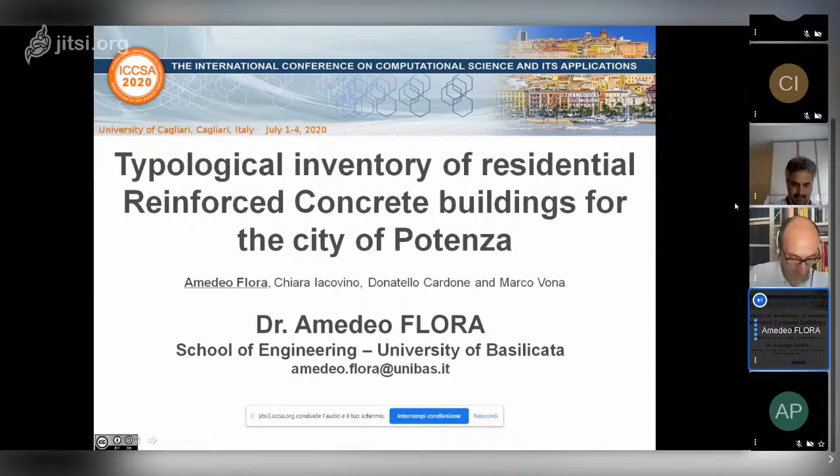Yes. Okay, good morning everybody. My name is Amedeo Flora. I'm a researcher at the University of Basilicata. The title of this presentation and the related paper, as mentioned by Maurizio, is Typological Inventory of Residential Reinforced Concrete Buildings for the City of Potenza. First of all, let me say that the proposed study is just the first part of a larger research activity aimed at the evaluation of the seismic resilience of the examined area.

This study is funded by the PON Research Project and is focused on cultural heritage protection. The main goal of this part of the study is a preliminary investigation on the built heritage of the city center of Potenza, and also the identification of the main typological and structural features of the residential reinforced concrete (RC) constructions through an integrated approach based on census data, documentary analysis, and site and virtual inspection. The main product is a building typologies inventory composed of 36 elements, 36 typologies.

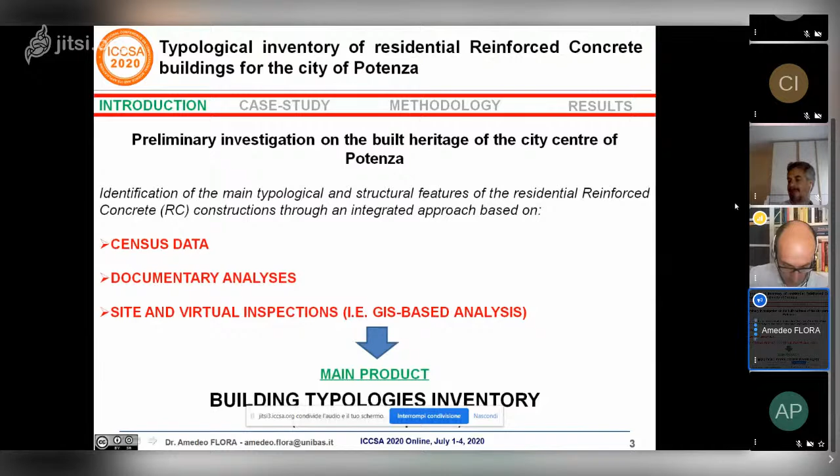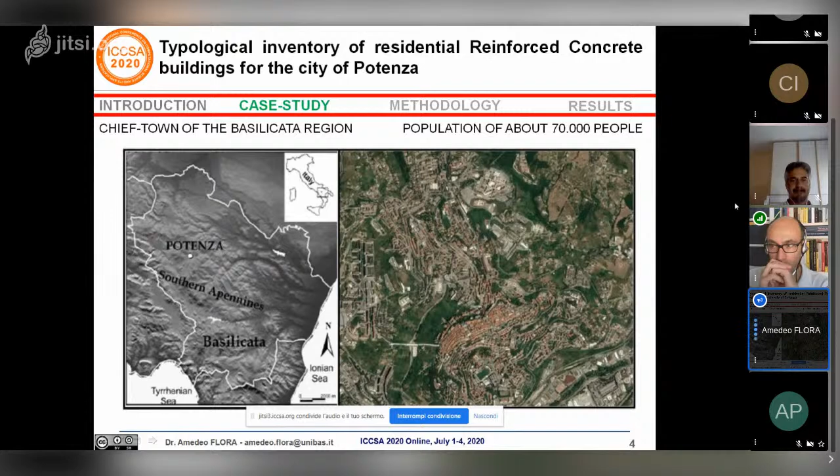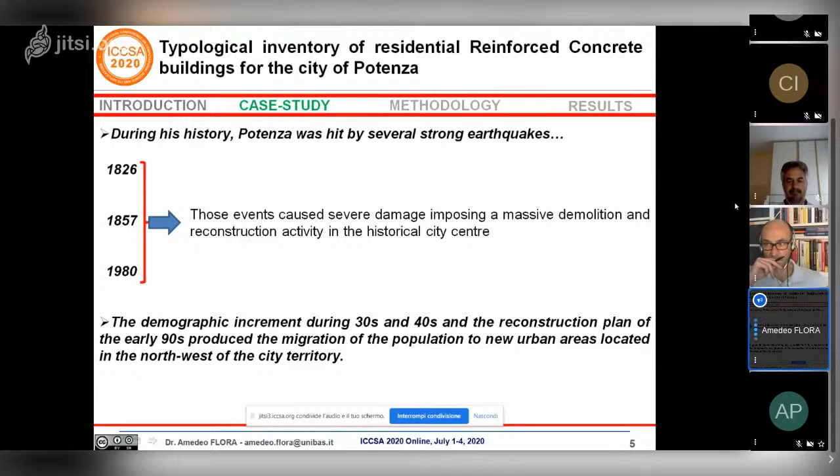The city of Potenza has been selected as case study. Potenza is the chief town of the Basilicata region in southern Italy, with a population of about 70,000 people. During its history, Potenza was hit by several strong earthquakes, in particular those of 1826, 1857, and 1980, which caused severe damage, imposing massive demolition and reconstruction activity in the historical city center. Moreover, from the urbanistic point of view, the demographic increment during the 1930s and 1940s and the reconstruction plan of the early 1990s produced the migration of the population to new urban areas located in the north-west of the city territory.

All that considered, in the present study, two main sample areas, including most of the historical built heritage of the city, have been investigated.

So the hilltop town, labeled as C1, and the residential public housing neighborhood, labeled as C2 in the figure. And those areas can be considered as homogeneous zones, or compartments, featuring specific historical, urbanistic, and constructive peculiarities.

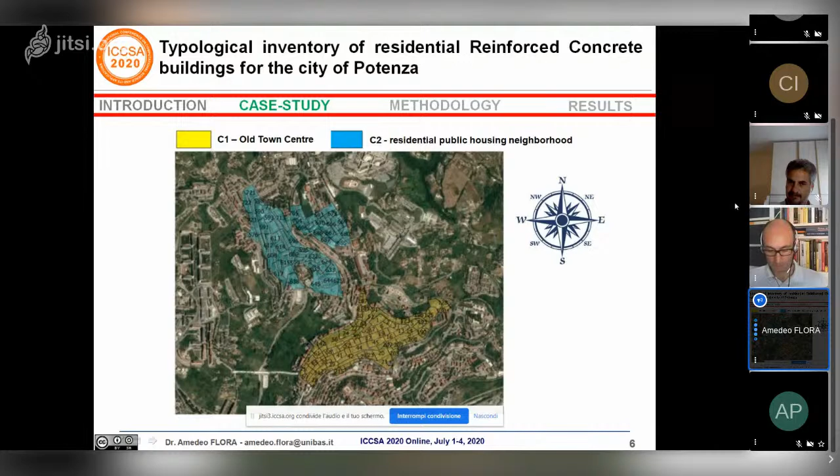For what concerns the methodology for the inventory definition, we can say that the assembling approach is based on the combination of two different informative levels. The preliminary source is represented by census data provided by the Italian Institute of Statistics, ISTAT, but unfortunately these data are available only in aggregated form due to privacy policy. So secondary sources of information are needed to integrate the census data for the definition of the inventory.

In the following slides, you can see some data obtained from ISTAT in the aggregated form, and in particular, first of all, the percentage distribution of residential buildings in terms of construction materials, in terms of age of construction, and in terms of number of stories. So, focusing on the more relevant data, we can note that, first of all, in both compartments, the percentage of masonry buildings is prevalent, and as expected, this percentage is extremely high in the old town center, C1, being equal to approximately 80%.

However, a significant percentage of RC buildings, approximately equal to 25%, is also observed. And this is probably due to some political decisions on the whole town planning taken between 1945 and 1970. In fact, in this period, many old masonry buildings in the historical center were demolished and replaced by new RC buildings, and similar interventions were carried out in the aftermath of the Irpinia and Basilicata earthquake in 1980, and this led to a non-negligible percentage, around 10%, of RC buildings realized in the period 1981-1990.

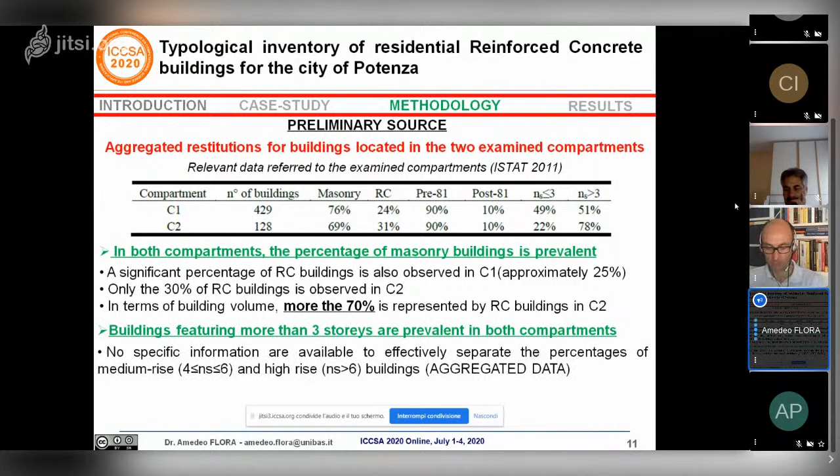Moreover, considering that the seismic behavior is strongly affected by the structure height, important considerations can be derived analyzing the aggregated data with respect to the number of stories. In particular, buildings featuring more than 3 stories are prevalent in both compartments, C1 and C2. But unfortunately, as mentioned before, based on the aggregated data, no specific information is available to effectively separate the percentage of low, medium, and high-rise buildings.

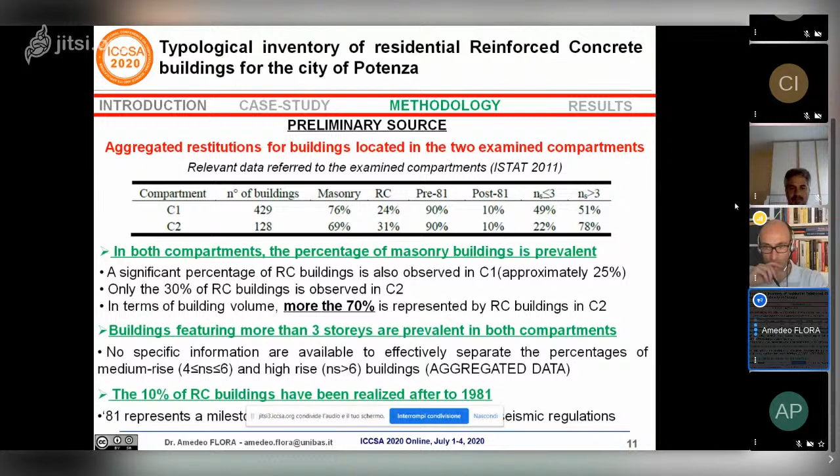Finally, we can note that 10% of RC buildings have been realized after 1981 in both compartments, and this is very important considering that 1981 represents a milestone for the introduction of the first seismic regulations in Italy. So, based on the previous considerations, 2 main variables emerged as significant classification parameters, in particular the number of stories and the age of construction. For the age of construction, 2 main groups have been identified: pre- and post-81 buildings.

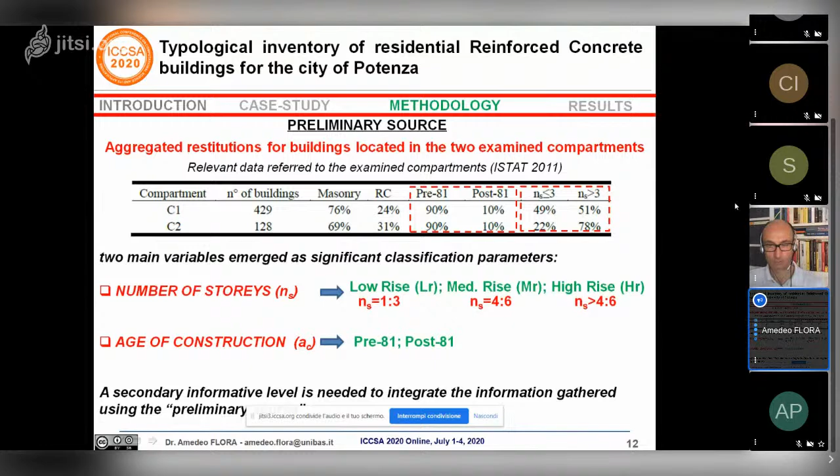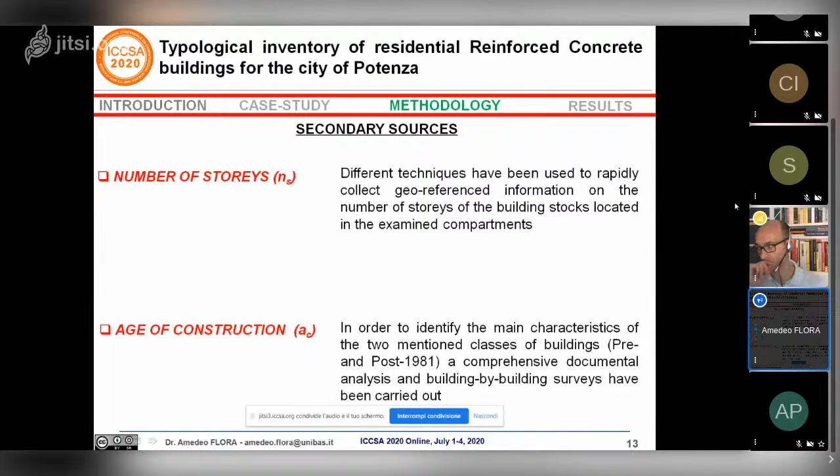Obviously, a secondary informative level is needed to integrate the information gathered using the preliminary source. For the number of stories, different techniques have been used to rapidly collect georeferenced information on the number of stories of the building stocks located in the compartments, thus allowing a proper deaggregation of the mentioned data. For the age of construction, in order to identify the main characteristics of the 2 mentioned classes of buildings, pre- and post-1981, a comprehensive documental analysis and building surveys have been carried out.

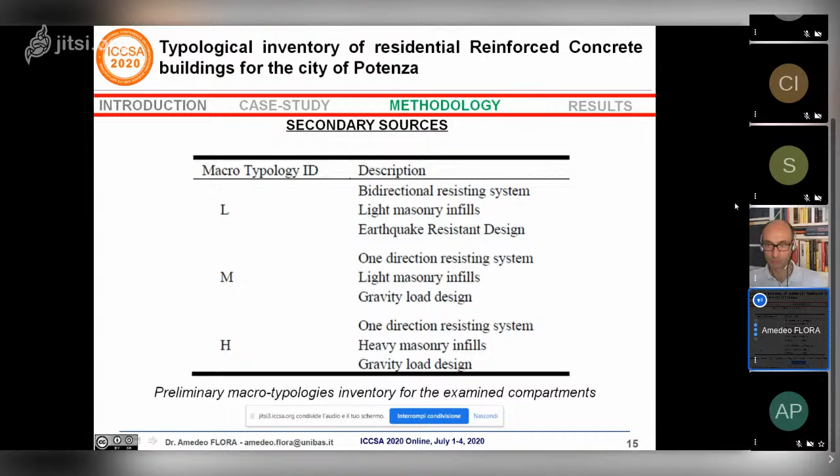The preliminary inventory can be then further refined considering other specific building attributes that strongly affect the seismic behavior. So, besides the number of stories, other significant attributes are represented by irregularities in elevation and staircase typology. In particular, vertical irregularities are frequent for both pre- and post-1981 buildings and are mainly represented by an open ground story, so pilotis stories at the first floor.

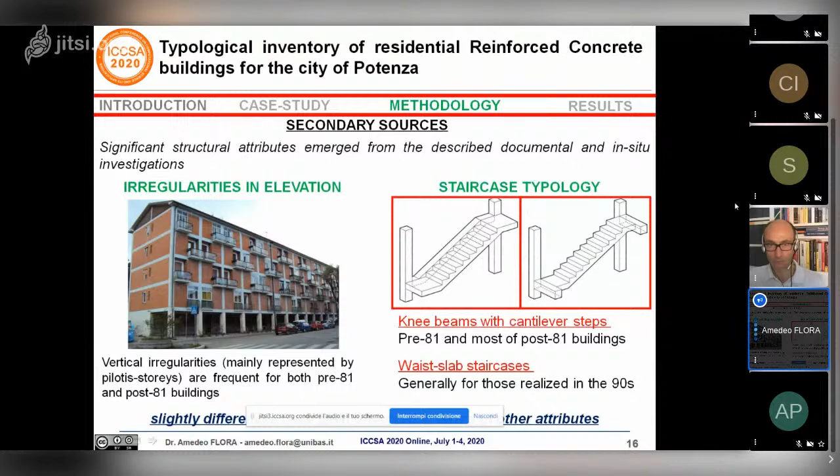On the other hand, 2 main staircase typologies have been considered: knee beams with cantilever steps and waist slab staircases. Then slight differences have been observed in terms of other attributes, such as roof type, horizontal floor, etc. So, such attributes have been neglected in the final inventory.

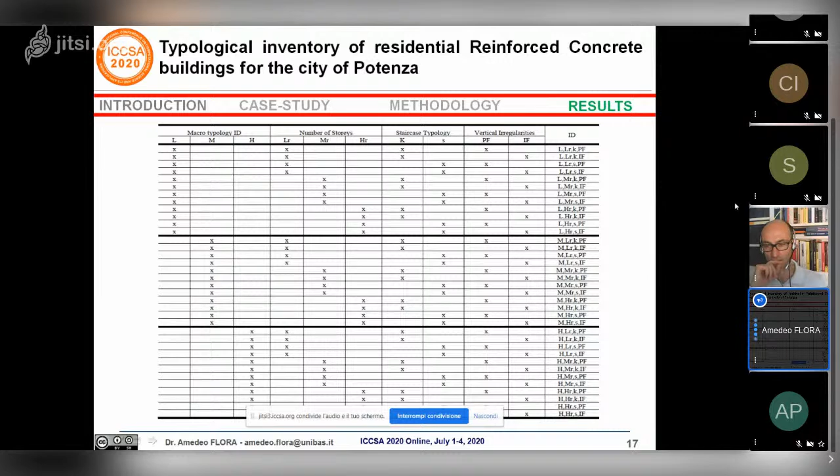The final building inventory, obtained adopting the described approach, is shown in this table, and as you can see, 36 classes have been finally identified, considering all the mentioned attributes. You can see number of stories, staircase typology, vertical irregularities, and all the peculiarities that are directly included in the macro typologies, L, M, and H.

So, in conclusion, first of all, a simplified approach aimed at assembling a building typologies inventory is presented and applied to the urban residential area of Potenza. A preliminary inventory for RC buildings has been defined based on heuristic criteria.

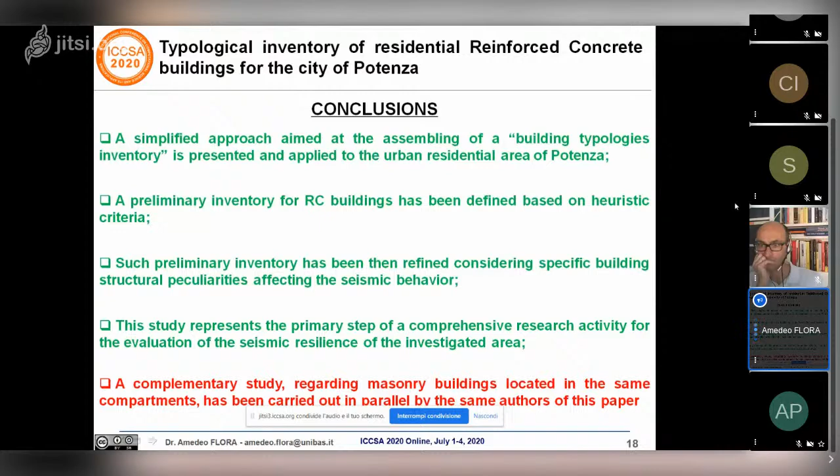Such preliminary inventory has been then refined considering specific building structural peculiarities affecting the seismic behavior. And it is important to note that, as mentioned in the first slide, this study represents just a primary step of a comprehensive research activity for the evaluation of the seismic resilience of the investigated area, and a complementary study regarding masonry buildings located in the same compartments has been carried out in parallel by the same authors of this paper and will be presented just after this presentation by my colleague Chiara Iacovino.

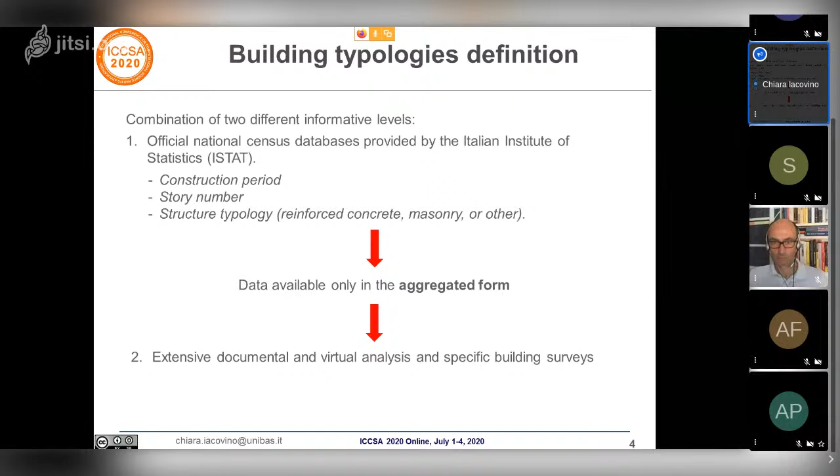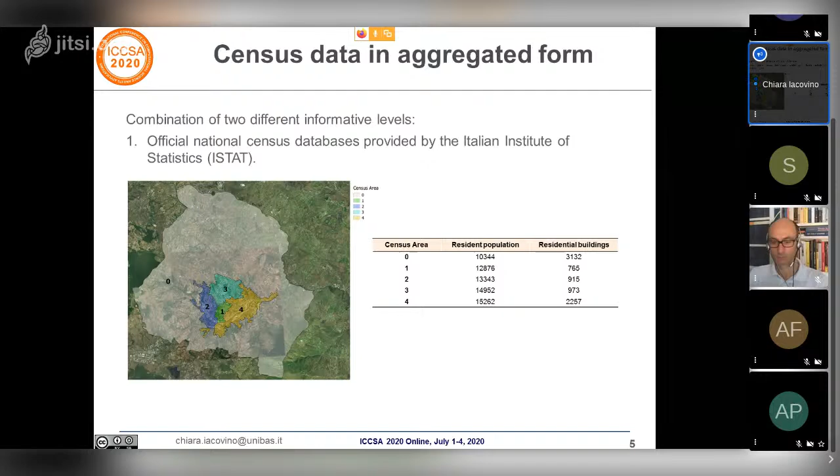This figure shows the selected census tract of the Old Town Center in yellow and of the residential compartment in blue. The tables report the aggregated data of the buildings located in the two compartments. We can see that the percentage of masonry buildings is high in both compartments, being equal to approximately 80% in the Old Town Center, but is also high in the residential compartment, where most of the buildings were built with a load-bearing masonry structure during the period

1940-1960. Buildings featuring more than 4 stories are prevalent in both compartments, but due to the aggregated form of this data, no information is available to separate the percentage related to masonry buildings from the percentage related to reinforced concrete buildings. And finally, we can see that in the historic center of Potenza, most of the buildings were built before 1919.

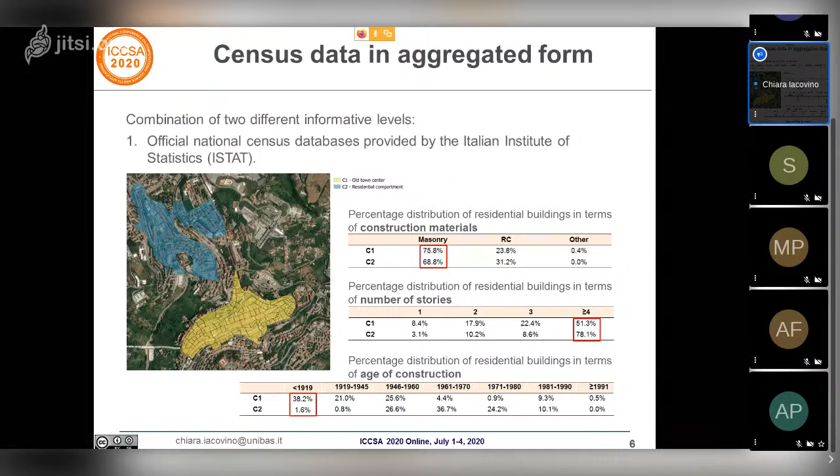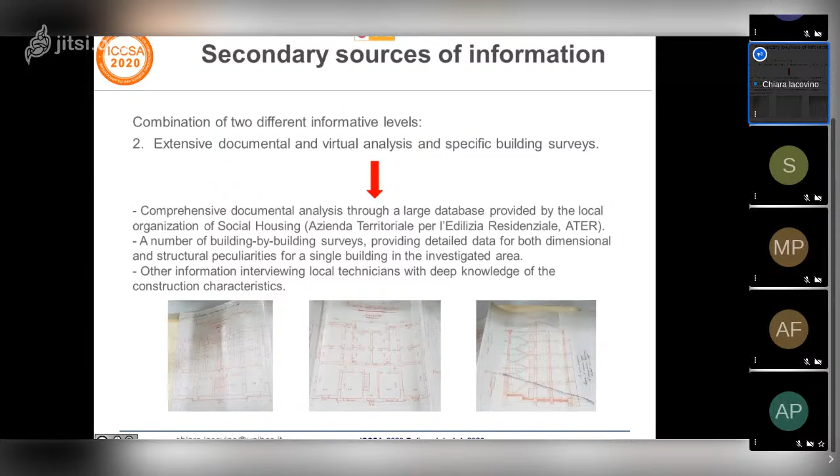In addition to census data, comprehensive documental analysis has been carried out. In particular, a large database provided by the local organization of social housing has been analyzed. Then building-by-building surveys have been performed, and finally other information has been obtained by interviewing local technicians with deep knowledge of the construction characteristics.

The most significant parameters, in addition to the number of stories and the period of construction, for example, the type of vertical and horizontal structure, the type of roof, the presence of vaults, the presence of mixed structures, and so on, have been considered. This table summarizes the main characteristics of the masonry constructions, named MUR, derived by the investigation.

The MUR 1 typology concerns the first buildings built outside the historic center during the 1920s. The buildings are made of regular masonry with floors with hollow bricks and steel beams, and no connections are present. So the seismic behavior of this typology of construction is usually ruled by the out-of-plane mechanism.

The features of the MUR 2 typology are external walls made of cut stone with good bonding and a vault floor with bricks and steel beams. Over the years, some of these buildings have been subjected to localized seismic intervention, consisting mainly of widespread connections. The third typology groups constructions made by solid brick masonry with a rigid slab and connections between vertical walls and horizontal elements.

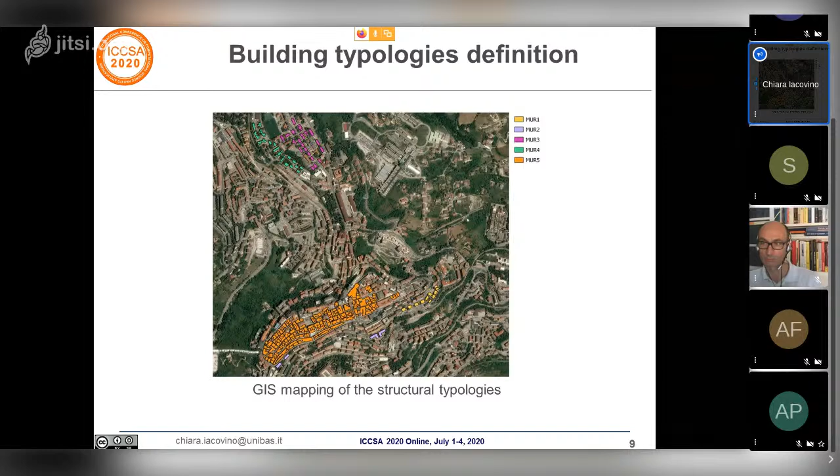This figure shows a GIS mapping of the different structural typologies. The preliminary inventory, composed of 5 macro typologies, has been further refined considering other building characteristics.

With regard to the number of stories, the analyzed masonry structures can be grouped into 3 classes: low-rise, medium-rise, and high-rise buildings. With reference to the shape in plan, 2 other classes have been considered, and finally, 2 more classes have been identified taking into account the presence or not of the slab-wall connection.

So, starting from 5 macro typologies and then considering 3 classes for the number of stories, 2 classes with reference to the shape in plan, and 2 classes with reference to the slab connection, we have identified 60 typologies.

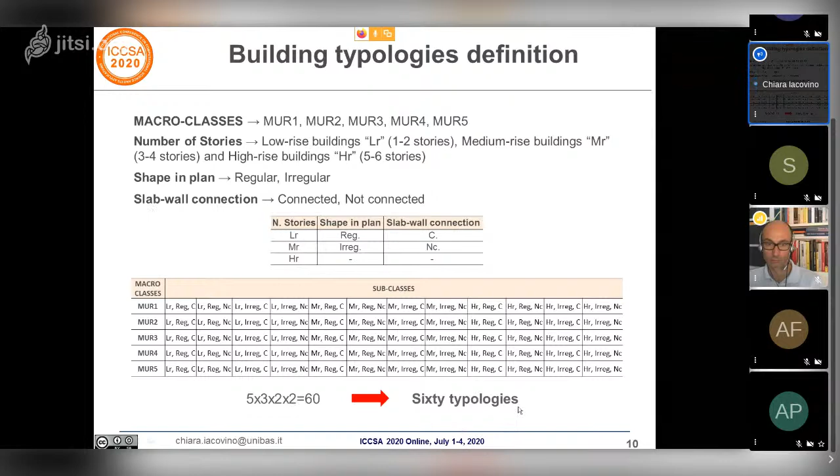To conclude, in this work, a simplified approach aimed at defining a masonry building inventory is presented and applied for the urban residential area of Potenza.

A preliminary inventory has been defined and then further refined considering other specific building structural characteristics, arriving at 60 typologies. It's worth noting that other characteristics, such as structural element dimensions, building position in a block aggregate, and the percentage and arrangement of openings in walls, will be taken into account at a later stage of the research project, particularly during the numerical modeling of the selected buildings.

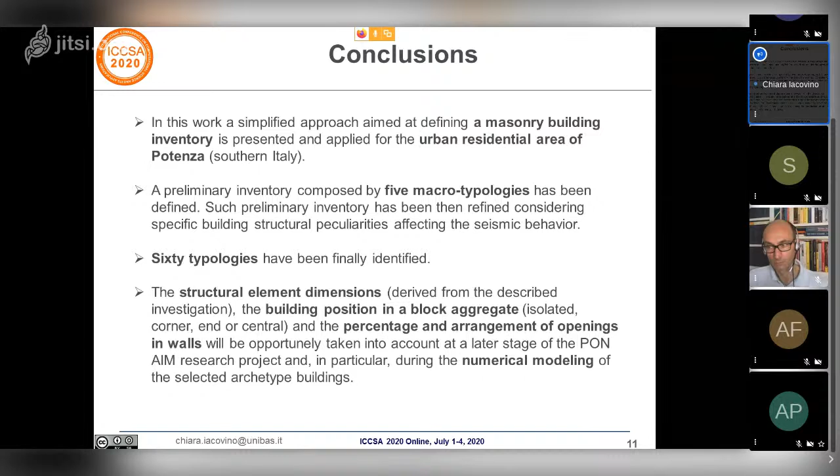Thank you for your kind attention.

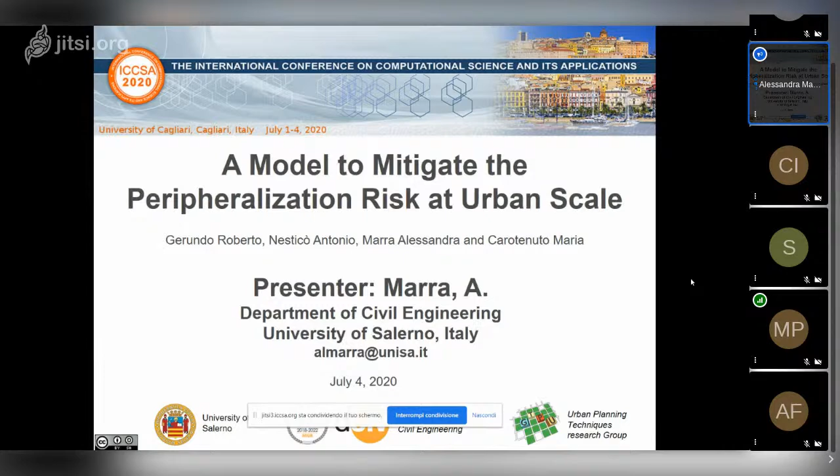The expansion of cities and of multiple forms of poverty on a global level has changed the geography of degradation. In Europe and in Italy, degraded urban areas are often associated with peripheries, born starting from the edge of historic city centers. But nowadays it is appropriate to talk about peripheralization rather than peripheries, as some scholars have observed also in other disciplines, such as economic geography, social sciences, and so on.

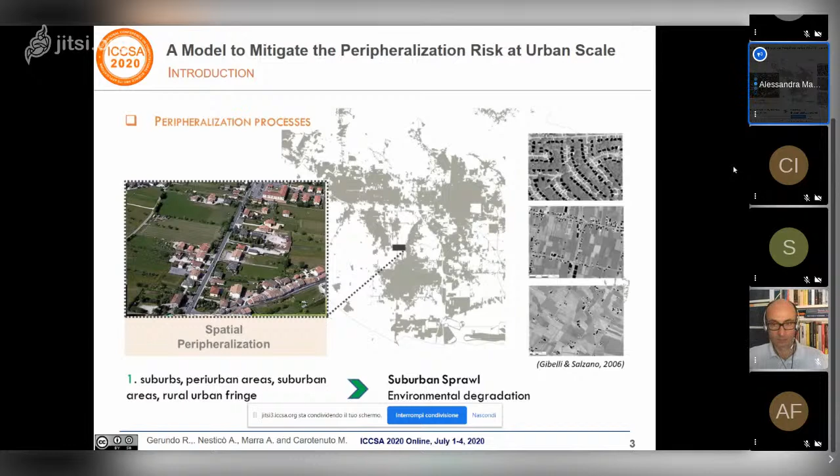Peripheralization is intended as a dynamic process that produces degradation in spatial peripheries, with reference to peri-urban areas where risk is mainly connected to sprawl and land consumption. But this process can also affect typical central areas with reference to the multidimensional concept of urban poverty or to the European one of deprivation.

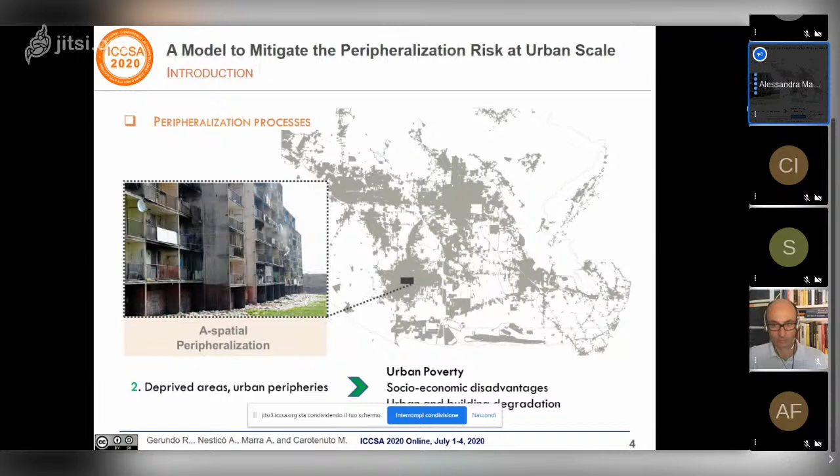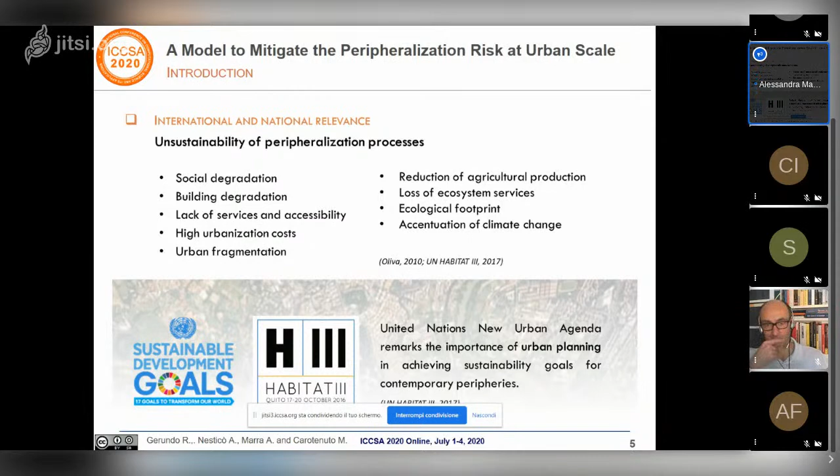All these processes are associated with unsustainability. Reducing land consumption and urban poverty through the regeneration of deprived areas are key issues to the new urban agenda and to the European Union. In fact, over the years, the European Commission has financed several actions to reduce degradation, with, for example, urban regeneration projects.

In Italy, scientific criteria are generally not used for the identification of degraded areas subject to intervention, but their recognition is usually delegated to the municipal authorities, on the occasion of call for funding.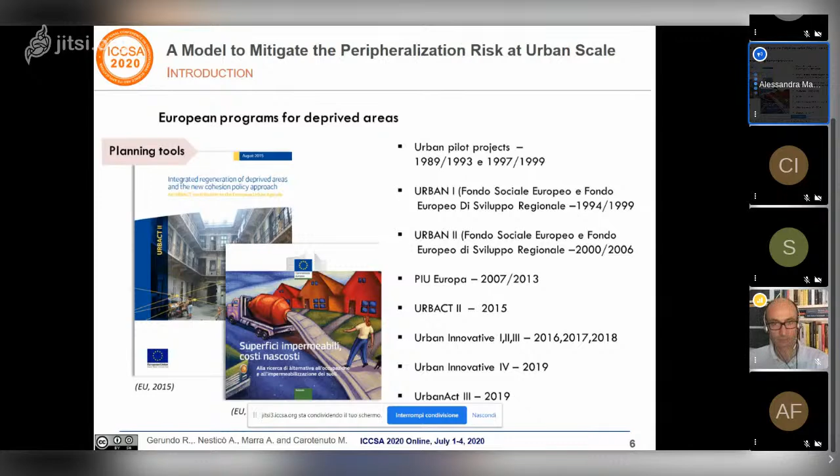Interventions are mainly driven by economic convenience in real estate transformations. In contrast to this, some scholars propose multi-criteria evaluations of project proposals in order to maximize public benefits. Among the different techniques, the use of the analytical hierarchy process is frequent. In fact, it allows consideration of a greater number of criteria, an important feature in the evaluation of complex programs.

Such as regeneration programs. However, in the light of the new urban and socioeconomic geography, regeneration interventions must be directed primarily to the most vulnerable areas. So decisions about the most effective project proposal should be informed of persisting vulnerability levels, and this is possible when the planning and the localization of interventions takes into account the multi-criteria evaluation of the best design alternative. This is our idea, and the novelty of the work.

So the objective of this work is to characterize a model for the mitigation of peripheralization risk at urban scale, so as to provide a decision support system for the choice of the best design alternative in order to maximize risk mitigation.

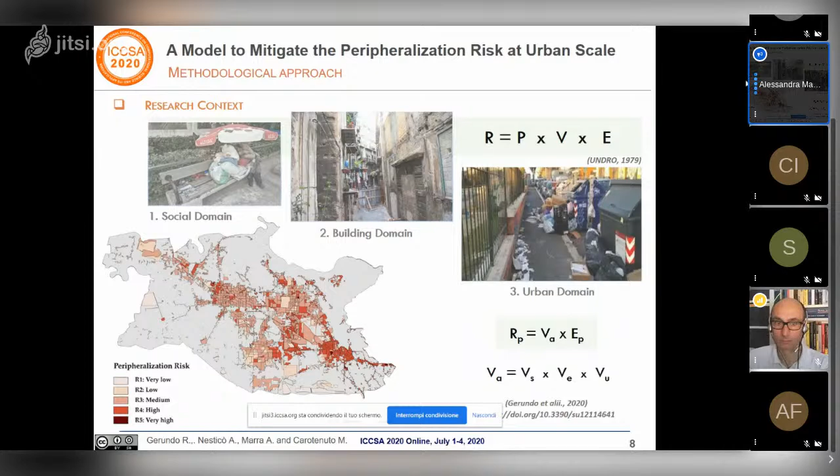Following that work, the method here proposed identifies a set of mitigation indicators with specific reference to vulnerability indicators used for the localization of priority areas. Mitigation indicators here proposed allow estimation of the effects of project proposals on social, building, and urban domains, with the aim of reducing vulnerability and therefore risk.

The first phase is the definition of mitigation indicators, then the procedure is articulated in all the phases of the analytical hierarchy process, with a little variation, as we will see.

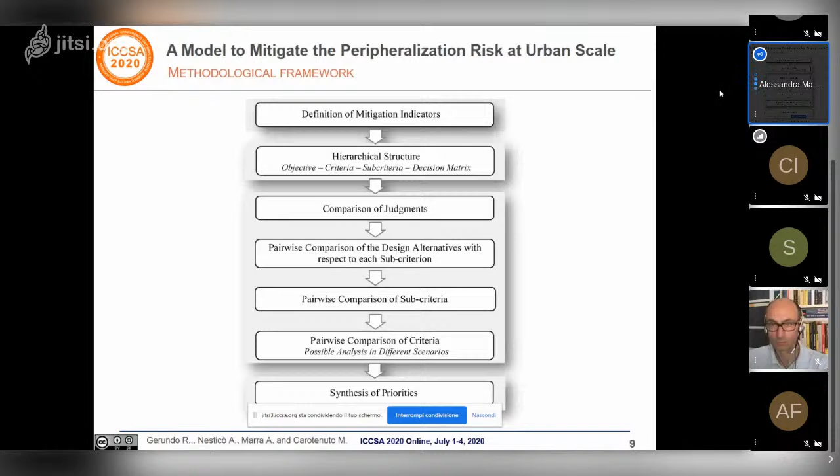With reference to the social domain, mitigation indicators measure new employees, graduates in secondary school, and the ability of the city's physical functional structure to attract young families.

With regard to the building domain, they measure interventions to improve the state of building housing stock. For the urban domain, indicators estimate actions aimed at increasing supply of services and permeable green spaces, recovery of abandoned or degraded areas, as well as reducing the fragmentation of the urban fabric.

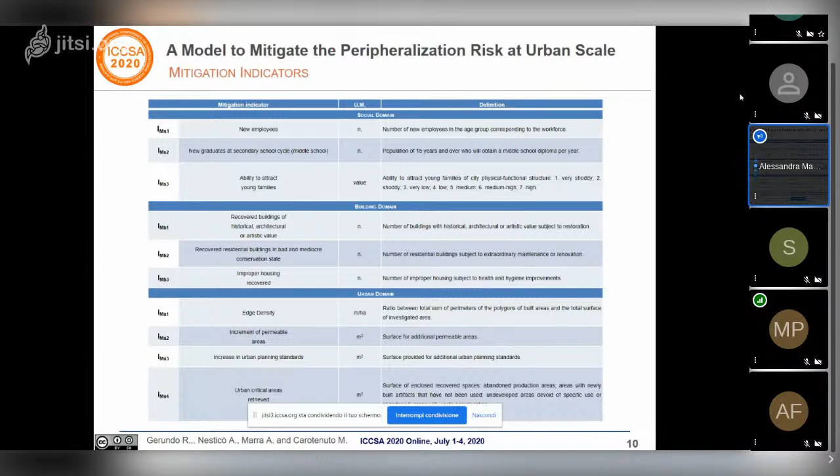The proposed dominance hierarchy consists of 3 levels. At the highest level, there is the objective. At the second level, there are the criteria, which correspond to vulnerability domains. At the third level, there are the sub-criteria, to which mitigation indicators correspond.

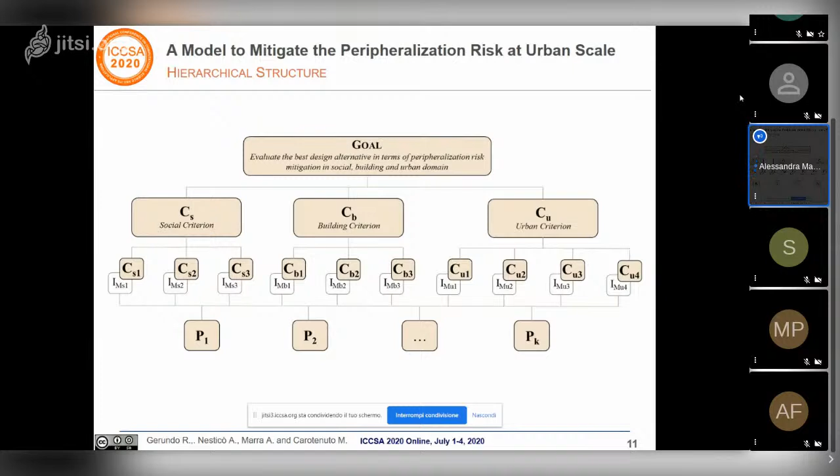All 10 sub-criteria are measurable for each of the K design alternatives, among which the decision maker is called to choose. For each design alternative, the values of mitigation indicators constitute the lines of the decision matrix, while the columns relate to the values of the specific sub-criteria.

We proceed to the pairwise comparison of project proposals with respect to each sub-criterion, then to the pairwise comparison of sub-criteria for each domain, and then to the pairwise comparison of criteria.

The pairwise comparison was carried out with reference to Saaty's semantic scale, useful for the attribution of dominance coefficients. In the pairwise comparison of criteria in particular,

Analyses in different scenarios are possible. For example, in the first scenario, all criteria have the same importance, while a very relevant scenario that is possible to consider is that where the weight of the criteria depends on the vulnerability levels obtained from the peripheralization risk analysis already carried out in the research project.

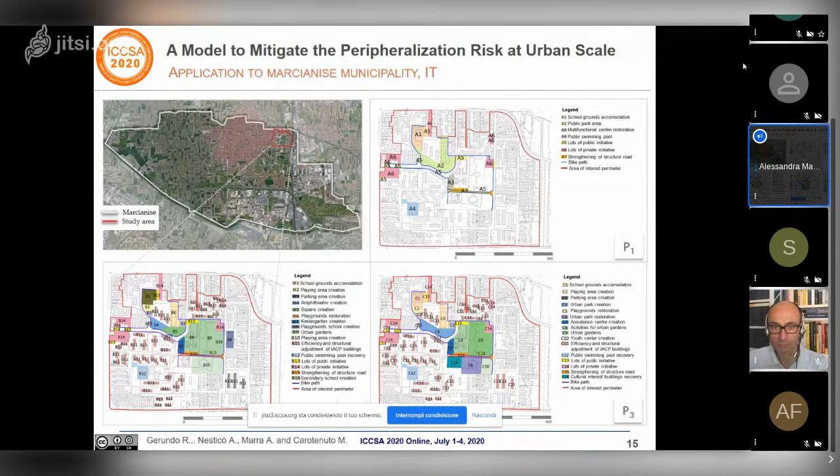decision makers have a choice among three different project proposals which involve different interventions. I show very quickly the results. In the zero scenario, all the criteria have the same importance, while in the other one, weights of criteria depend

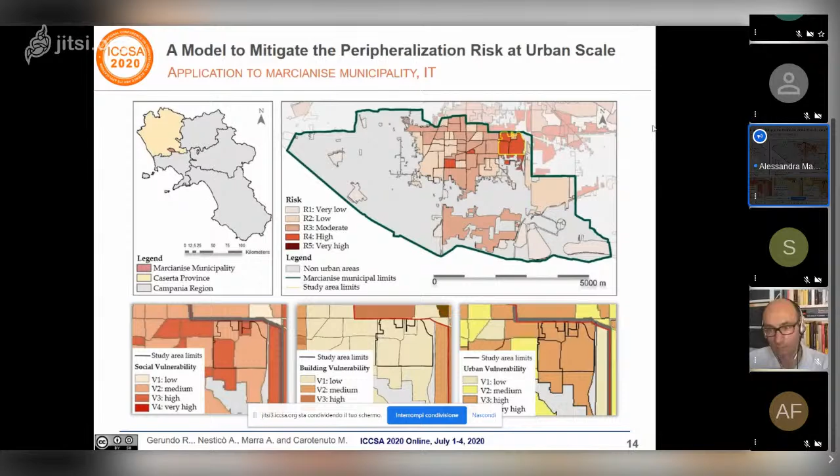Very quickly, the first proposal pays particular attention to the desealing of impervious areas. The second one gives emphasis to social animation, and it is more attractive to young families thanks to the creation of jobs and greater reception in schools. The third proposal emphasizes the increase in facilities and services. So the priority one is the second, as we can see.

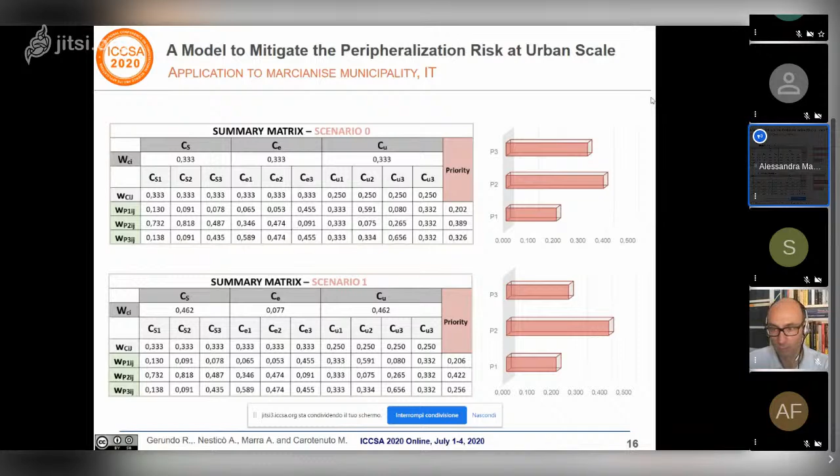The methodology proposes a decision support tool to evaluate the effectiveness of urban regeneration interventions in terms of peripheralization risk mitigation.

I want to underline that the proposed methodology requires the previous identification of urban areas most at risk, where regeneration interventions should be prioritized. And given that a high risk level depends on a significant aggregate vulnerability, the method for estimating that vulnerability is crucial, of course.

This is especially true because in the scientific community there is no agreement on what the most appropriate set of vulnerability indicators is and how to combine them. So in the broader research project to which this work belongs, a method of combining indicators based on fuzzy logic was proposed, allowing us to manage the uncertainty related to their aggregation. Following this work, we have defined the method here proposed.

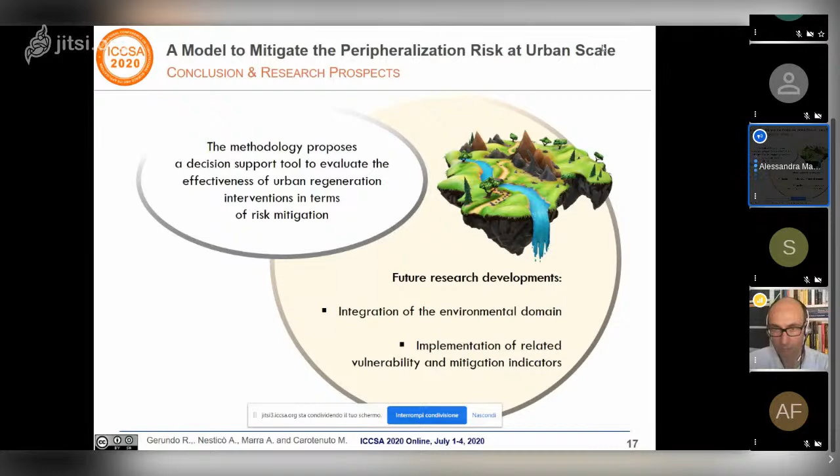Future research developments may concern integration of the environmental domain and the implementation of related vulnerability and mitigation indicators. For example, air pollutants, urban waste, and fuel poverty can contribute to the development of peripheral conditions in urban areas. So it will certainly be of interest to analyze how results vary, considering also these aspects.

Thank you for your kind attention.

Thank you, Alessandra, for your presentation. Very interesting also for you. I would ask the other participants if they have any questions.

Okay, from my side, just a question about the comparison criteria and the judgments provided according to the Saaty approach. How many experts were considered in this study, and which was their specific expertise to provide the judgments.

We performed the evaluation in synergy with the project evaluation laboratory, but we defined the so-called first scenario depending on pre-existing vulnerability levels, in order to reduce the subjectivity of choices made with respect to study scale. So the novelty of the work is the relation of the planning and localization of interventions in the most vulnerable areas with the evaluation of the best project proposal, in order to maximize risk reduction, properly considering pre-existing vulnerability levels. Okay, thank you, it's clear.

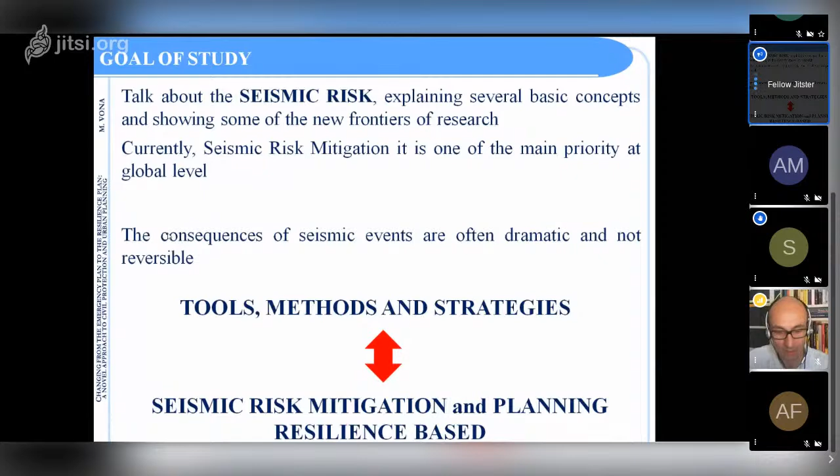Okay. So in this presentation I speak about changing from the emergency plan to the resilience plan. This is a novel approach to civil protection and urban planning. Currently, seismic risk mitigation is one of the main priorities at the global level. In fact, the consequences of seismic events are often dramatic and not reversible. Then you need tools, methods, and strategies for seismic risk mitigation and urban planning, but for me these strategies and the new methodology tools should be based on resilience.

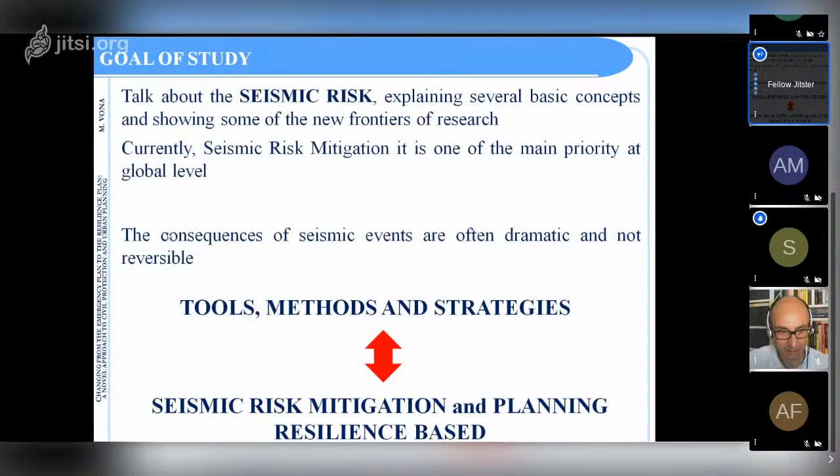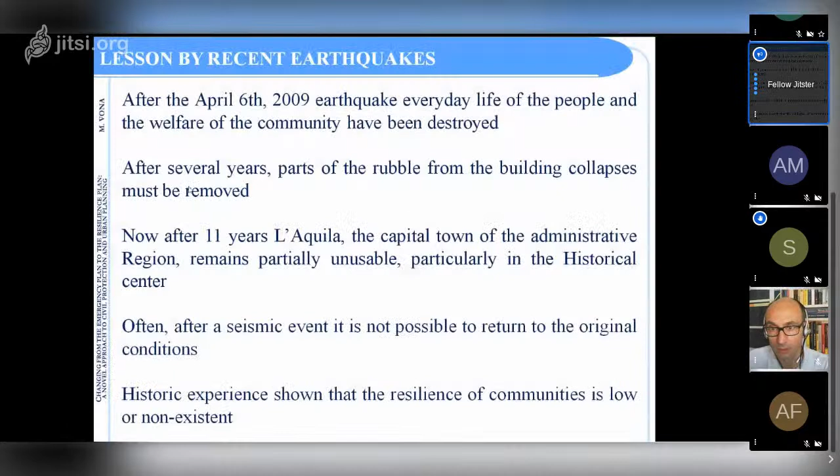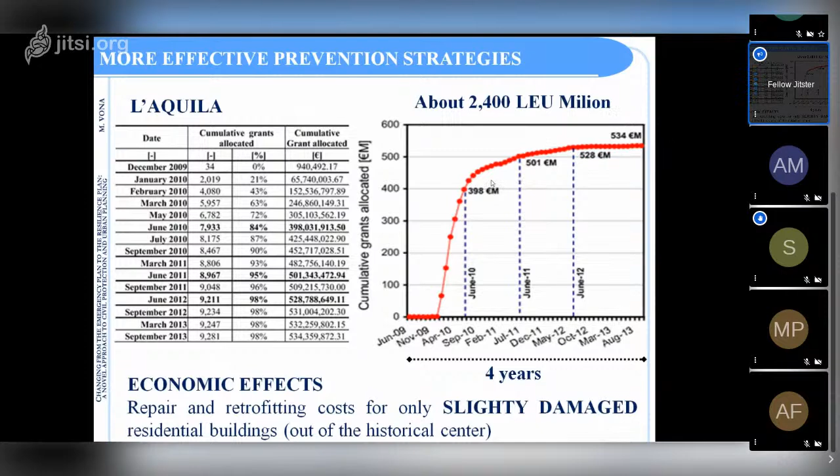Professor Vona, sorry, can I ask you to bring the microphone closer? Because it's very difficult to grasp the sentences. Yes, sorry for the interruption. Yes, I don't know, this is the best way for my... You tell me.

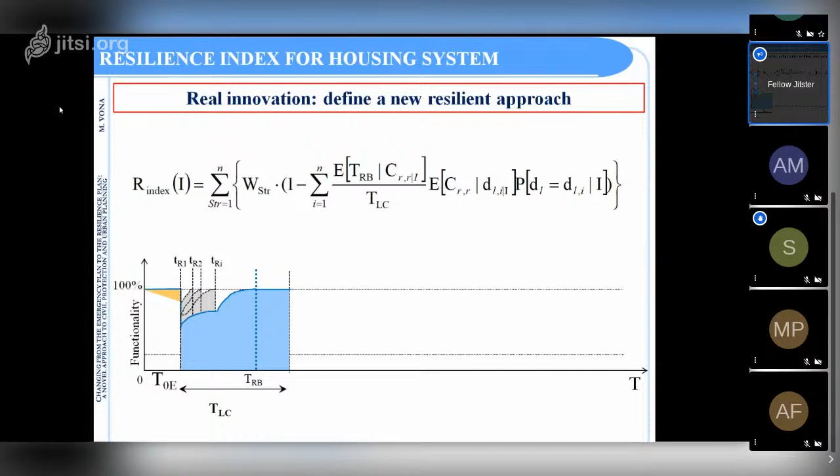So in this slide you can see the effect of mitigation strategy, and the resilience can be measured based on this resilience index. So we need a strong modification of current civil protection strategies, based on some examples in other parts of the world, for example Los Angeles and San Francisco City. Really, in Italy and other European earthquake-prone countries, resilience is strongly related to their social and economic condition, and structural condition, and in particular the presence of stronger buildings and the factors needed to protect and preserve the cultural heritage.

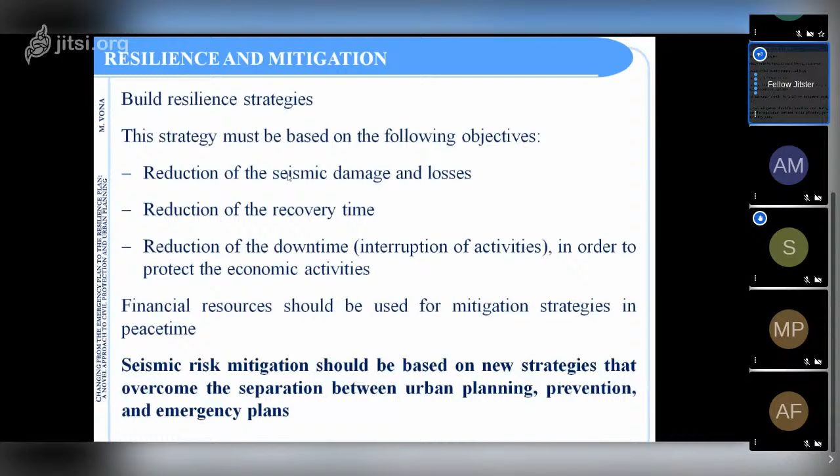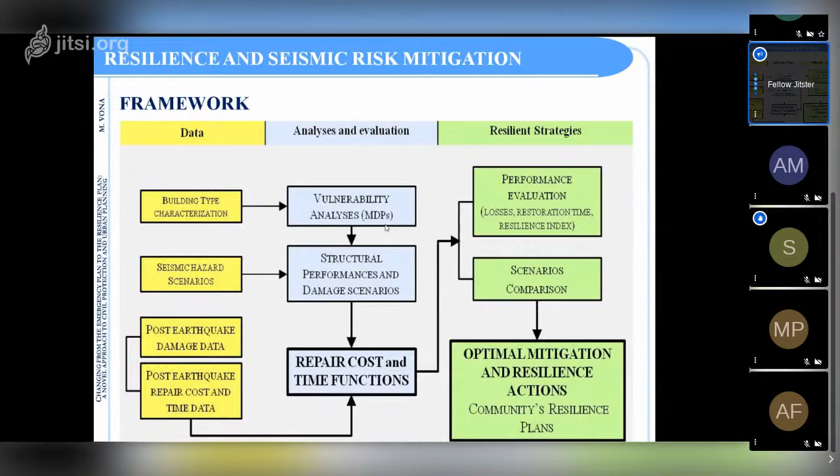So in this slide we can see the first application of this new trend for civil protection, based on the classic resilience concept of reduction of seismic damage and losses, recovery time, and reduction of downtime, so interruption of activity, in order to protect economic activities. This is the general framework of the study, based on classic steps to define the seismic scenarios for the building stock. The study is based on a simple case study, and the case study is a little town, Miglionico, in Matera. This is a little town in the south of Italy.

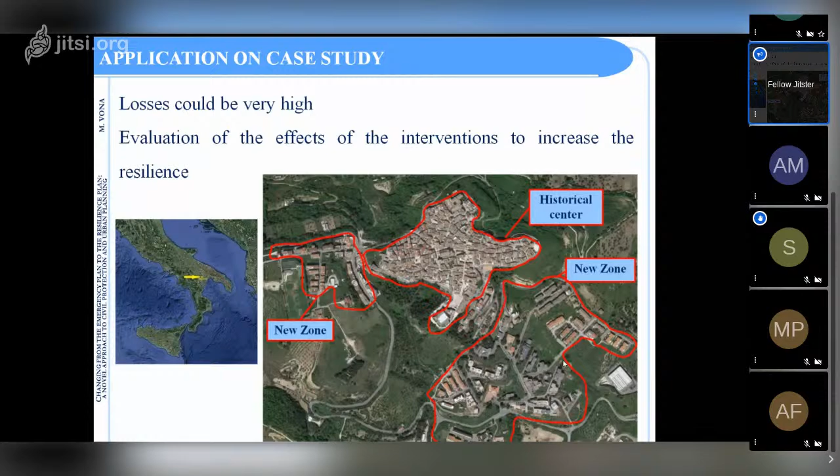In this slide you can see the location of the case study in southeast Italy, and this is the image of a little town. We studied this town based on the classic procedure to define seismic scenarios based on inventory of buildings, seismic vulnerability classes, assessment based on the classic approach using the European Macroseismic Scale.

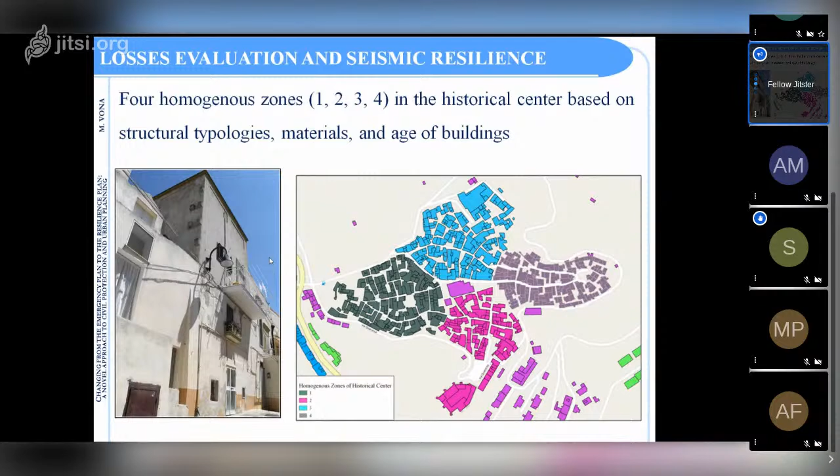Then we consider the seismic scenario and representation of damage scenarios based on damage probability matrices. In the slide you can see the survey of buildings in this case study and the subdivision into 4 different zones for the historical center.

Based on structural type, material and age of building, in the slide you can see the statistical distribution of vulnerability classes. We have defined the classic steps to resilience study based on recovery time, and in this case the recovery time is based on available data from L'Aquila and subsequent reconstruction process.

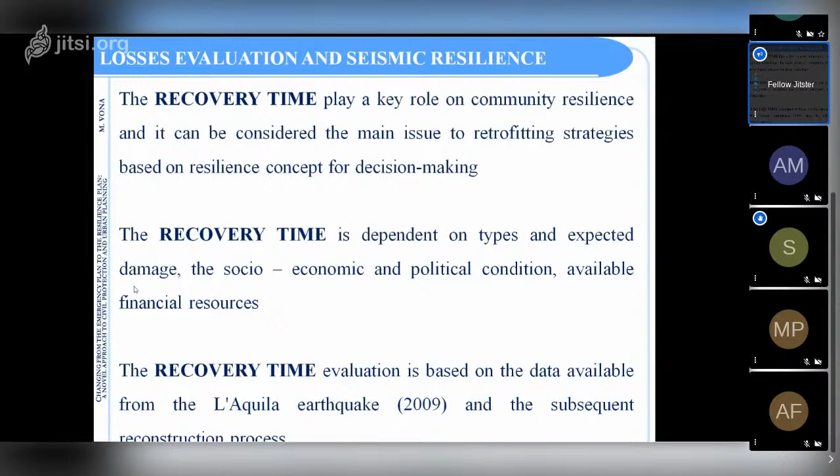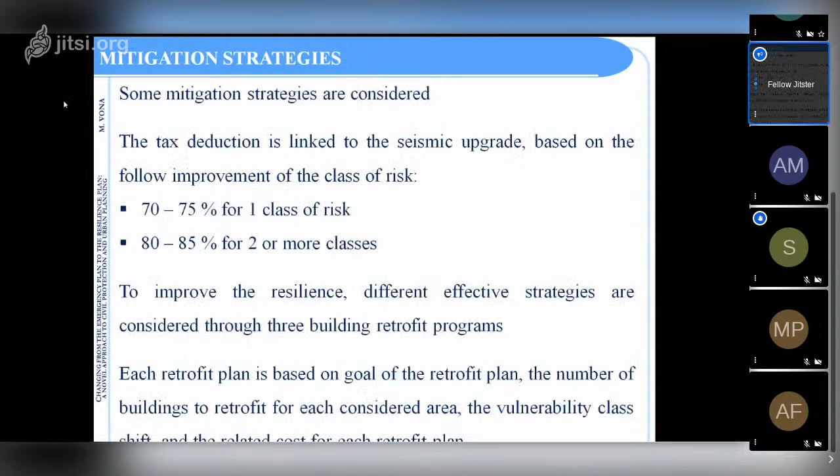Then, based on the concept of resilience, different mitigation strategies are defined and investigated in this study. For each strategy, we have defined 1 or 2 steps or shifts for vulnerability classes, or in the last strategy, the total upgrade of buildings.

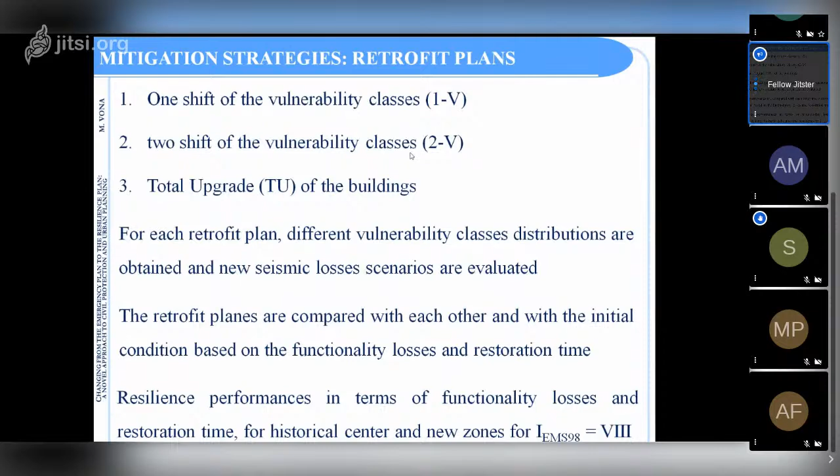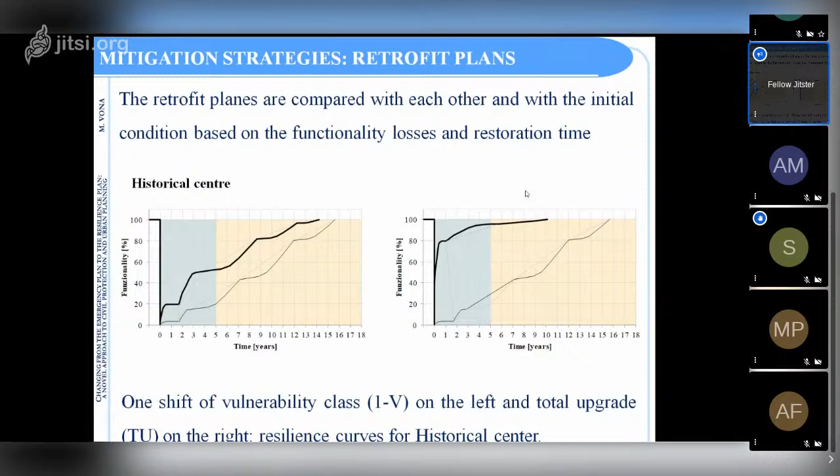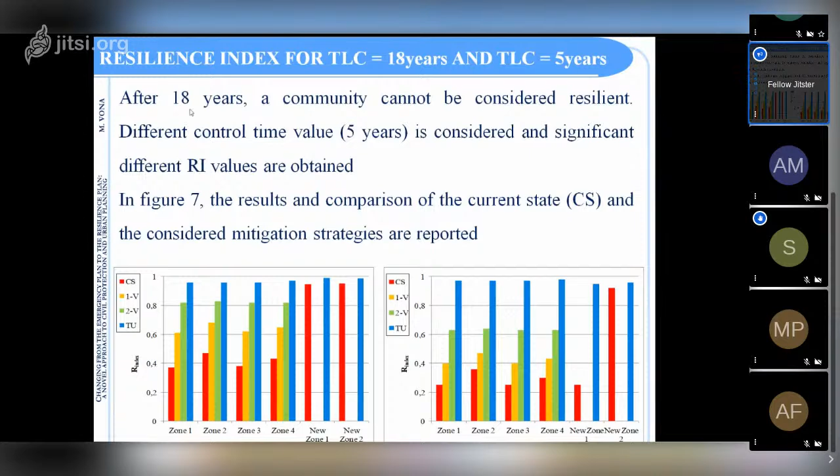Then in this slide finally you can see the difference of the resilience index in the case study, based on the different mitigation strategies, recovery time and control time.

So, in conclusion, the concept of resilience and its quantification is used to define urban regulation and planning. Improving the procedure is only possible by defining an effective resilience based on the decision process in seismic risk prevention. This approach plays a key role for mitigation strategies and consequent structural design criteria.

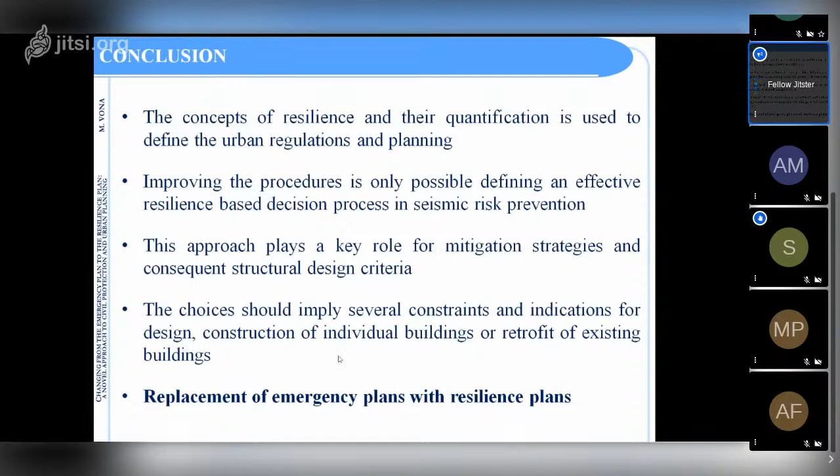The choice should give several constraints and indications for design and construction of individual buildings or retrofitting of existing buildings. The key point of the study is the replacement of emergency plans with resilience plans. Thank you for your attention.

And thank you, Marco, for your presentation. Very interesting. Any questions?

Well, I just have a question which is also a wider consideration about this important issue related to resilience and emergency. From the technical and scientific point of view, it is clear that

the resilience plan is fundamental and is an effective tool to deal with the emergency. But what is your feeling about the institutional point of view? How aware are the authorities of such aspects, for which we can shift from an emergency and post-event management of occurred events, and change our mind to start improving our resilience plan in order to be more prepared for calamitous events.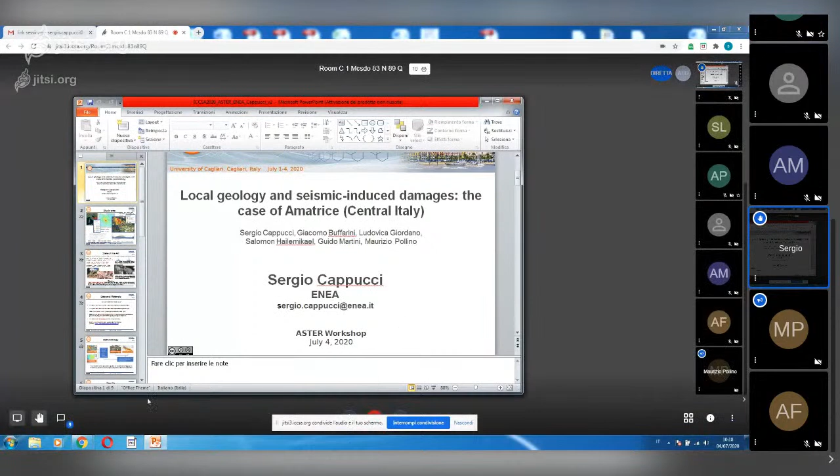Sergio, you can switch on PowerPoint, okay? You can switch into presentation mode, okay. We cannot hear you. Yes, click on. Okay, click on. No, you should click directly on the icon. Yes. Switch off the drop menu. Click on the... No. Sergio, click anywhere in the Jitsi layout. Anywhere in this, click outside of this, okay. Move the... maybe you can try refreshing your web page.

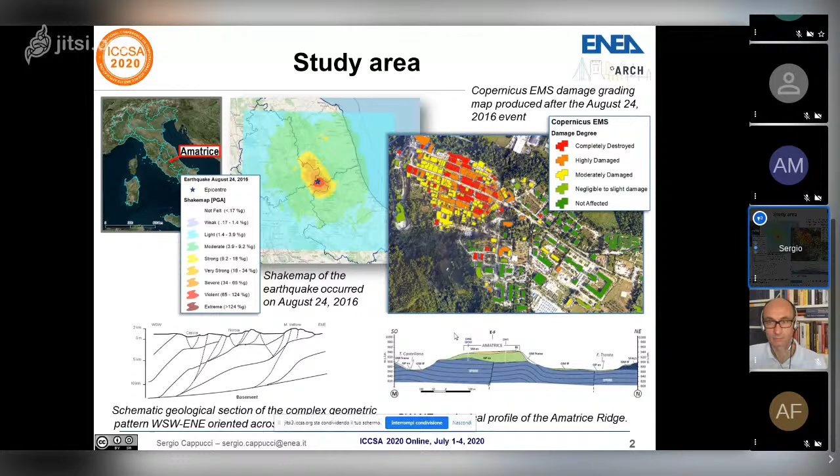And on the bottom, you can also find some information about the schematic geological section across the central Apennine and the morphological profile, geological profile of the Amatrice Ridge that is just in front of the Tronto River Valley and is characterized by an underground subsoil of calcarenite and hard rock overtopped by a quaternary layer. There is a landslide on the northeast sector, and Amatrice is just on top of this ridge. That is not the optimal condition for the earthquake amplification.

So what happened immediately after the main shock is that the Italian National Civil Protection was in charge of the emergency and post-emergency activities, and ENEA participated in many of these activities, but particularly in the working group for the determination of rubble volumes, the seismic microzonation activities in central Italy, the macroseismic survey, and the survey of co-seismic earthquake ruptures, the EMERGEO. This is not our first publication.

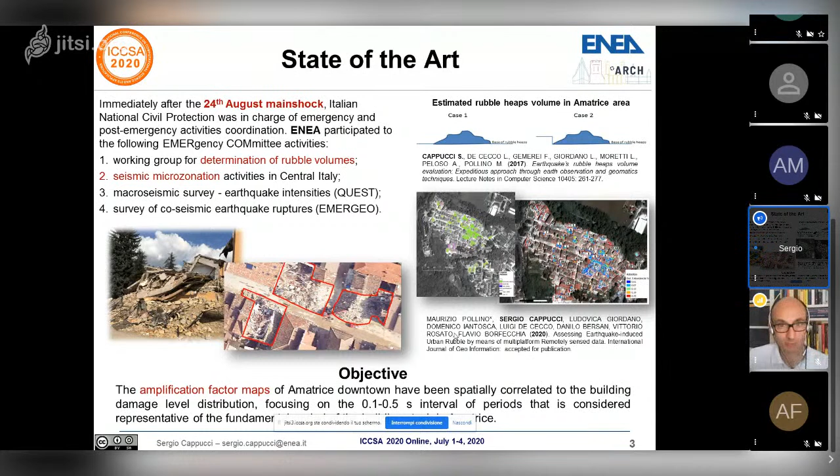We started in 2017 with a short paper in Lecture Notes in Computer Science, and with this first paper, we basically investigated an expeditious approach to estimate the rubble heaps volumes. With the second publication, we tried to address the possibility to characterize the composition, the nature of these rubble heaps, through multi-platform remotely sensed data. And we have also been able to detect the presence of asbestos within the rubble heaps. With this publication, we have another objective. We wanted to investigate the possibility to spatially correlate the building damage level distribution with the mapped amplification factors.

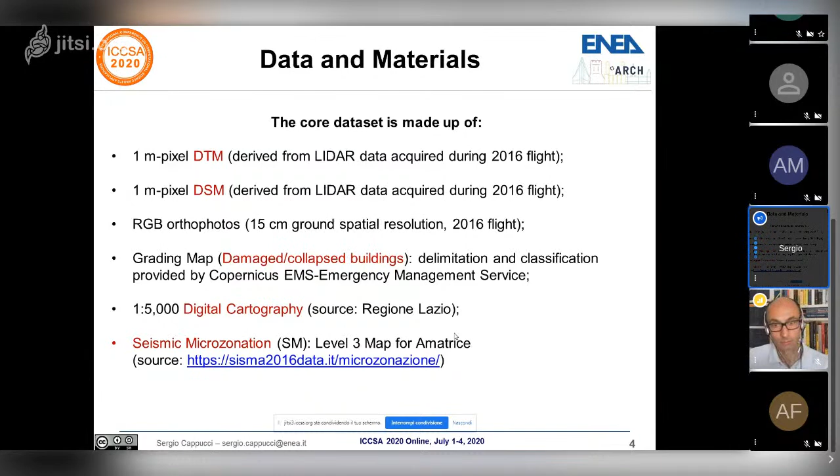So the data set is listed in this slide. We have used a digital terrain and surface model, orthophotos, the grading maps of Copernicus Emergency Management Service, digital cartography, and the seismic microzonation that was concluded last year, and you can find all the data set on this web page that is indicated at the bottom. The flow diagram of the procedure that we have implemented is illustrated in this slide.

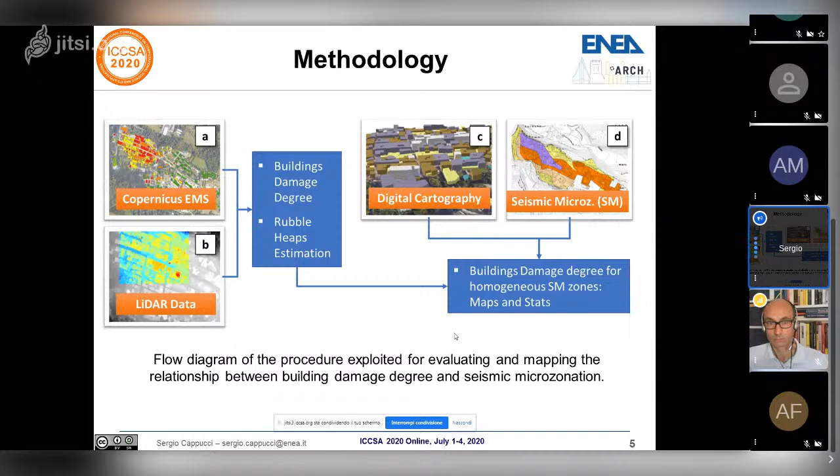So we have used the information from Copernicus and LIDAR to determine the building damage degree and the rubble heaps estimation. And through the use of digital cartography and the seismic microzonation, we have tried to correlate, in terms of visual observation and statistical analysis, the relation between the building damage and the different homogeneous zones. So this is a typical result that you can obtain with this approach.

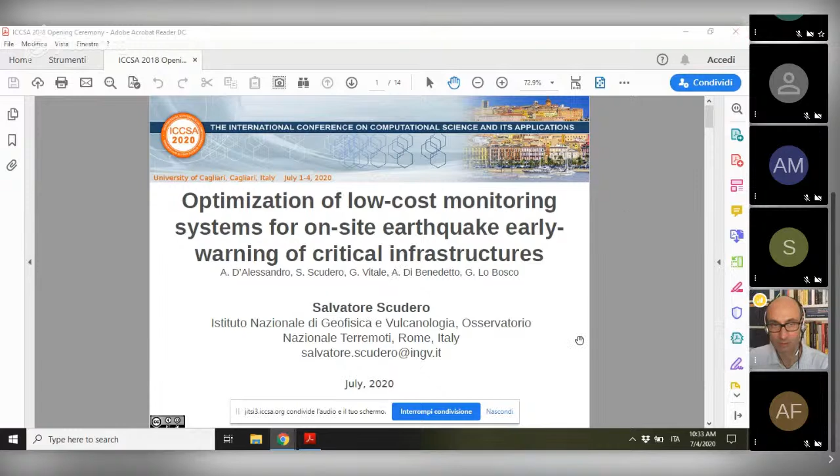The system has been deployed since 2018 in some cities in eastern Sicily, that we know is a really seismic risk prone region in Italy. And we had nice results. We've been able to record earthquakes, even small 2-point-some earthquakes, and to study the building behavior as it responds to such small events. And such small networks have been developing over time.

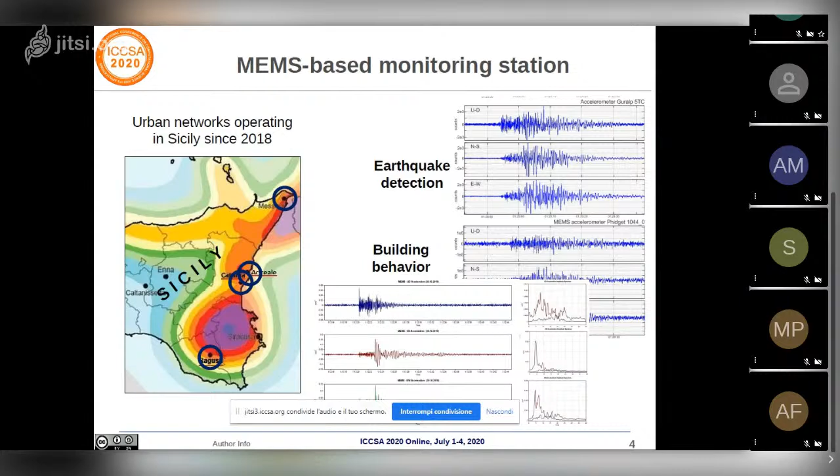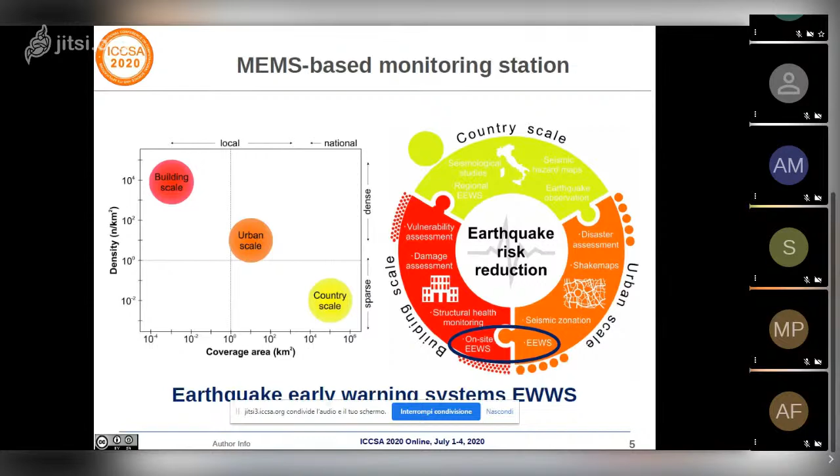We start with few stations there, and we are expanding the number of nodes in each network and also the number of networks. One of the characteristics of such urban scale or even building scale network is the possibility to implement a system for early warning in case of strong earthquake. As you know, probably there are two different approaches for earthquake early warning system. First one, which is based on a network, it's used in the case that the source region of the earthquake is far from the target region to send the alarm. So usually there is a warning time of even some minutes.

Differently, when the target area is very close to the source region of the earthquake, another approach is based on the single station. So it's the same station hosted in the building that sends the alarm for that building. In this case, the time for the alarm is really short. So the optimum of this system is for target region not more than 50 kilometers from the source region. In this case, we have just 20 seconds of lead time, but usually much less.

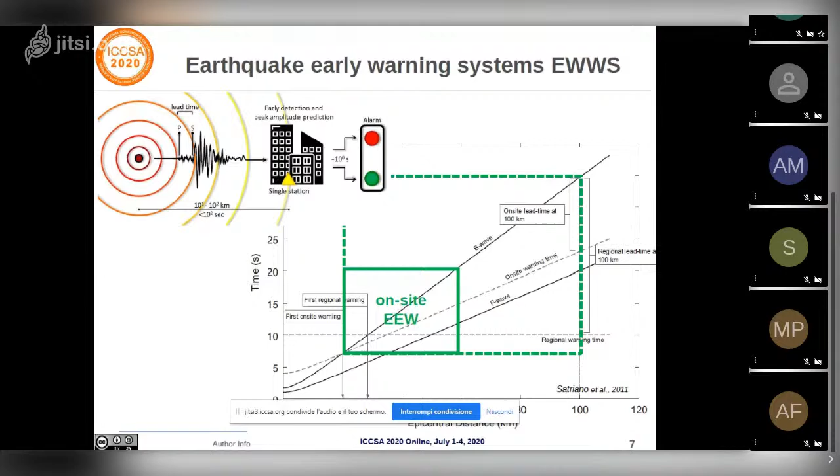So in this view, the system we build up is hosted in Eastern Sicily, where the sources of the earthquakes are really close. The single station, the on-site early warning system, is the approach we adopt. And in this case, where the time is so short, we need to be fast to compute the data. So first of all, we converted the code from Python to C, and we had a great improvement of the performance of the seismic station. And then, it's the main part of this work, we coded a trigger algorithm. So a system that can automatically detect the upcoming of a seismic wave.

It's a novel approach. It's quite simple and quite easy to implement. It's based on the standard deviation calculated for moving windows with variable duration, and each value calculated for the windows is normalized to the previous window. So we deal with relative energy variation rather than absolute variation. And we also set up 10 different trigger levels simultaneously, so that we can deal with different types of earthquakes with different frequency content.

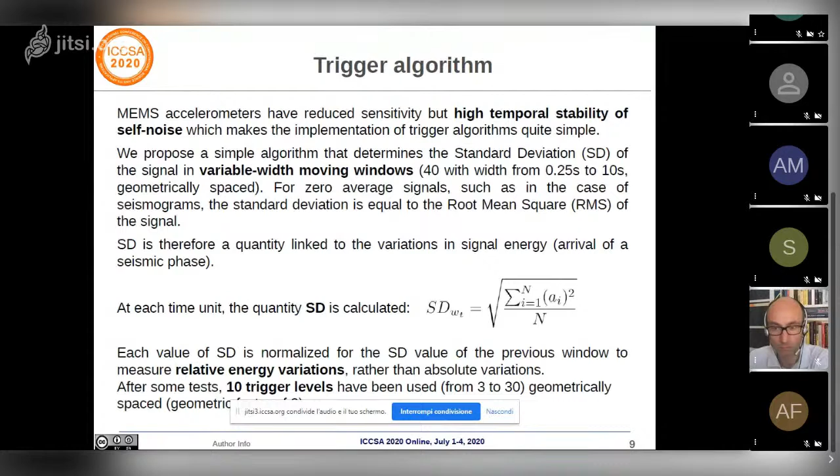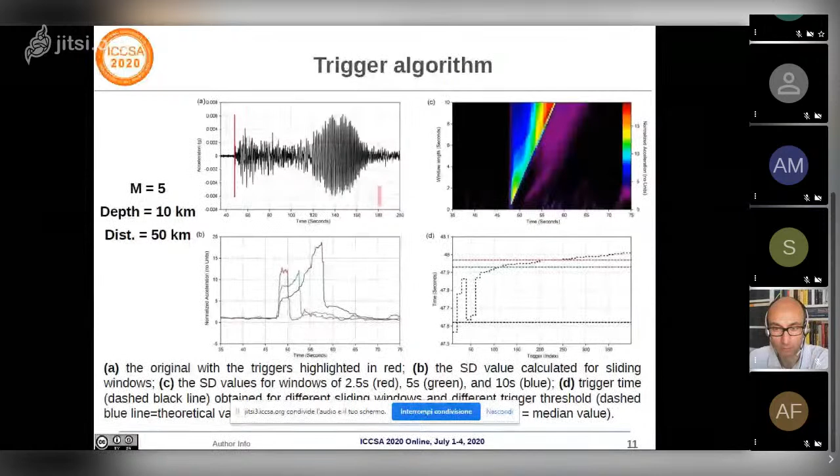The black line is the time we calculated for each combination of window and threshold level, and the blue line is the reference line, so the theoretical time at which the first wave arrived. In all the cases, we've been able to get the first seismic shaking in a few tenths of seconds. And it's quite a robust result,

even though we need to validate the system through dedicated, more detailed statistical analysis to define standard tests to assess the real performance of this algorithm. And the next step will be to tune the system for some representative applications within the wide range of potential real cases, starting from the network we have built up since 2018. So thanks for your attention.